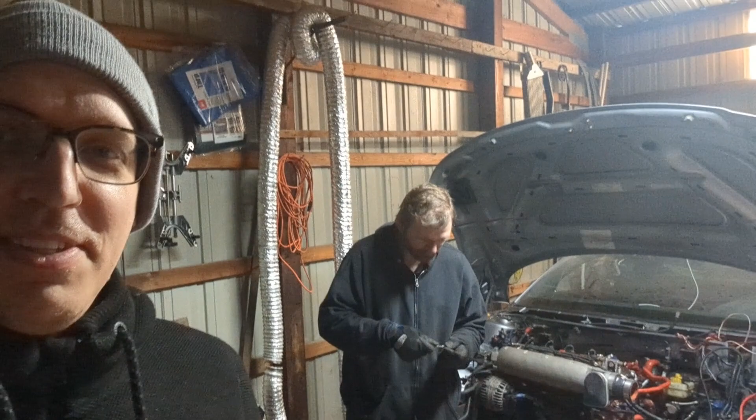The man who comes out of his cave to do the grunt work. Yep, as I've said in a previous video, which you haven't seen yet. No, I haven't even watched it. No, but I did say that.

But anyway, now we're going to get to the drive shaft union and the gasket for the downpipe, which...

Okay, so here we are under the car. Oh my god.

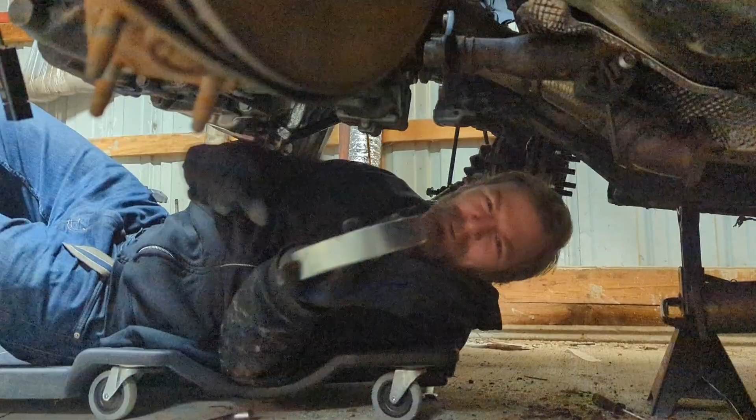I just forgot to record 5 minutes worth of stuff, but we're gonna put the new union on. So here's the new one covered with the metal shroud, and then the old one that we took the metal shroud off. That one's done.

We had a dent or crease a little bit in the downpipe, right around here. That's because the new exhaust manifold moves the turbo over, but it moves the downpipe closer to the drive shaft union. So we knew it was going to rub, so we dented that in. We're going to put the new one on and check the clearance, but it should be okay.

And then we have a new gasket for the downpipe to the rest of the exhaust, which we'll worry about in a minute. We'll put some thread locker on there.

There's 3 10 mil 12 points - is that right? Six, yeah, it's three per side. So we're going to put a little bit of thread locker on there, and then get those bolted up, and we should be good. Speaking of which, and that will be that.

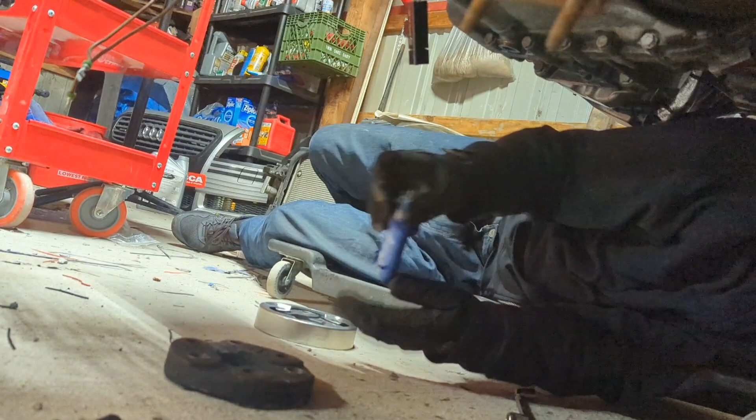And we'll be back when we make some progress.

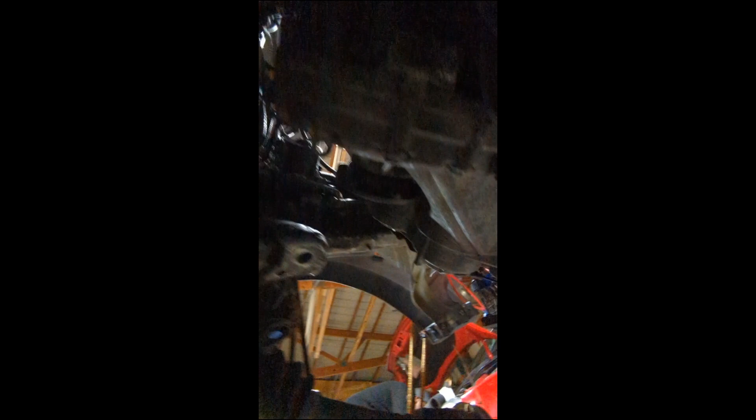Okay, let's see here. This, if you can see it right here, is the new union connected to the trans side. Next will be the drive shaft right here, which connects to 3 identical holes right here.

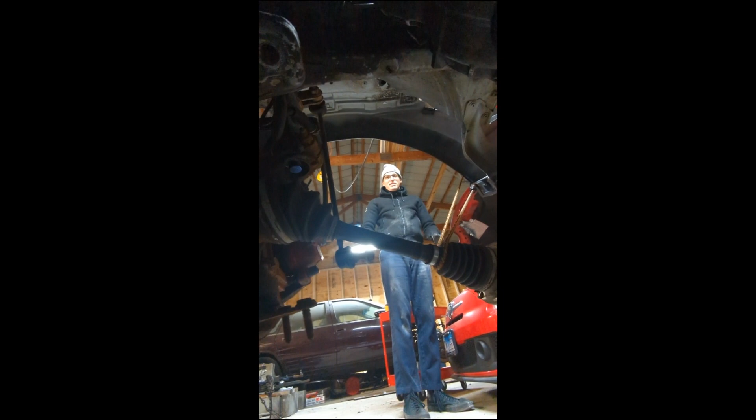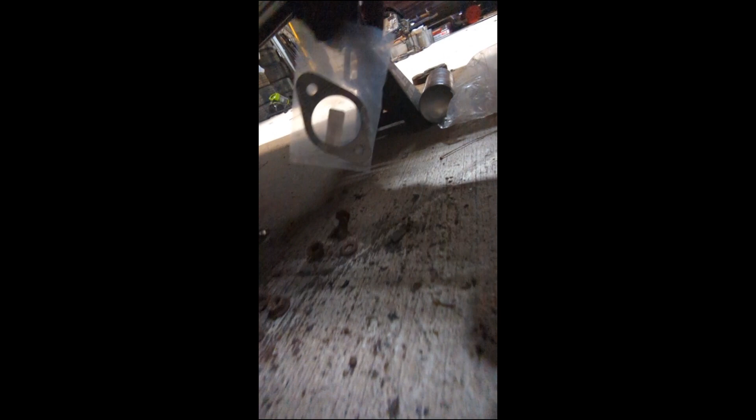And make sure that it spins and doesn't rub. Let's see here, the final - one rusted bolt here. And there's the other rusted bolt, and the nut, and the washer, and the other washer. And here is the gasket, brand new, pretty gasket, which will not look brand new after the first time use.

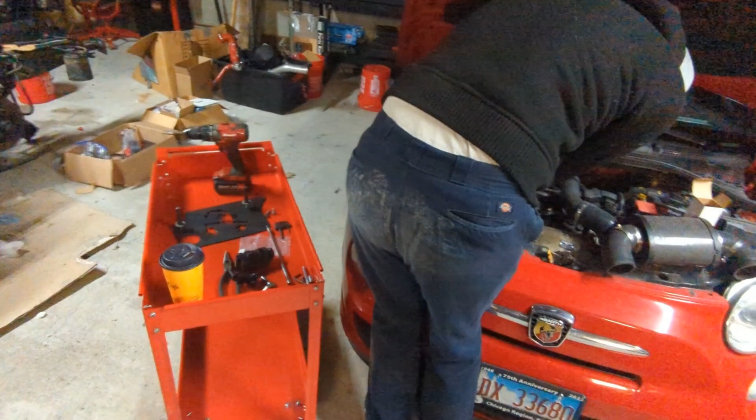And over here, we have a fine specimen of a man. Oh my god. All right, back at it.

So last video, or maybe I'm gonna clip them together, I don't know. But I was here with my friend, and it's kind of hard to do this with another person because stuff is just happening, and then it's like, oh wait, we got to record that, and then it's like, just button it up. So I'll kind of get you a little bit caught up. Not that we did anything major, but just so you're aware of what's going on.

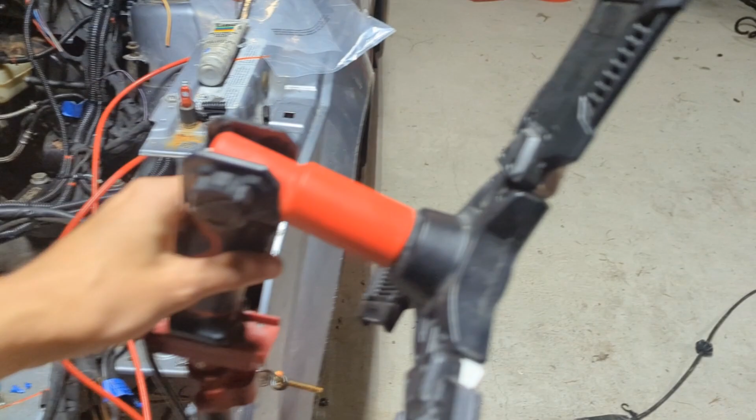So you may remember that the subframe was laying over there. That's on the car now. So the way that went down is, get some light going.

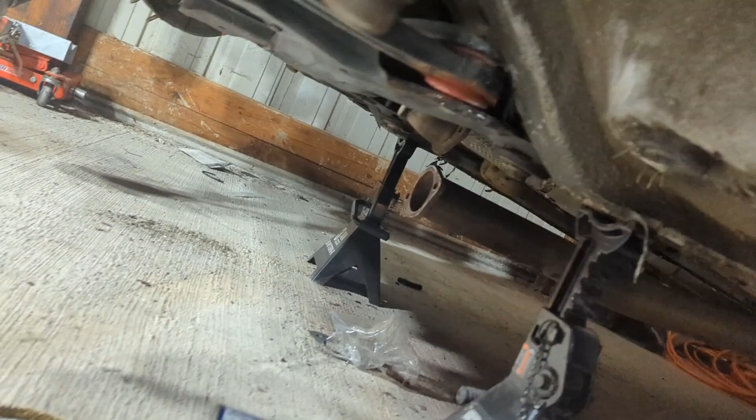So we just took a jack and set the subframe on. It's not that heavy - I mean, it's heavy, but not that heavy, especially with 2 people.

And then just started to run it up. It's 4 bolts - one, two, third one is tucked up here and then across.

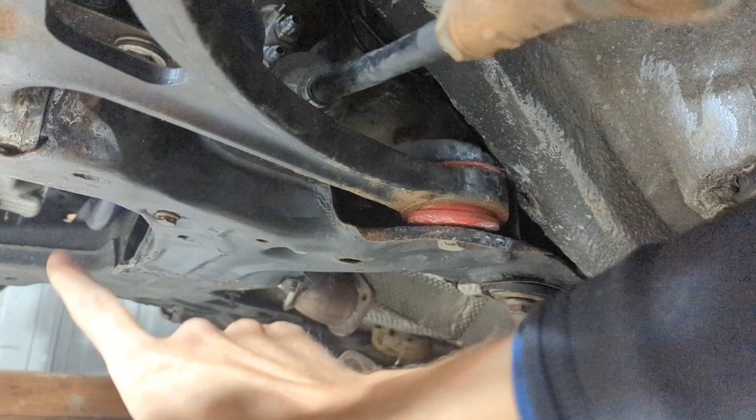This one kind of keeps spinning. I don't think it's stripped, but the subframe got bent when we were pressing one of the bushings out. And so I think what's happening is we're turning it and it's unbending it, but I'm kind of scared to strip that out because that'd be a nightmare to fix.

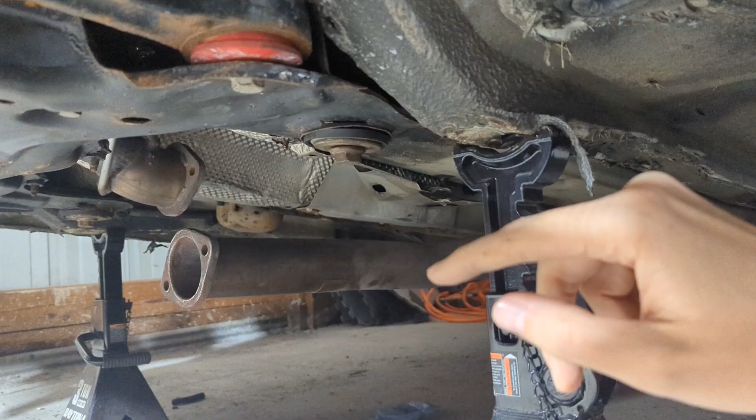So all the other ones torqued except this one, and I'm kind of of the mind to not mess with it. And that probably sounds dangerous, but I think if we just check it every so often, it'll hopefully be okay. I mean, it's tight, but...

I was thinking about maybe taking this one out, taking that good one out, painting like a line on it, and then screwing it back in and just counting how many revolutions it goes, and then do the same for this. And if it's tight but I'm only at half the revolutions, keep going.

But if that thing strips out, I'm not technically savvy enough to fix that, I don't think. Yeah, we could go with a bigger bolt, but I don't think that'll fit the bushing. Then it becomes a whole thing. So I'm thinking about just playing it safe.

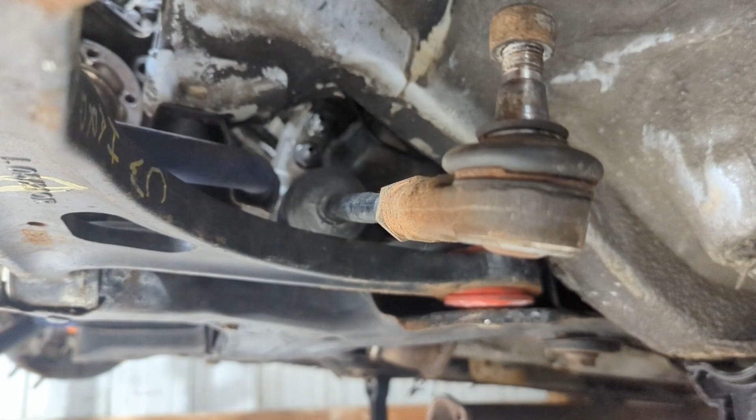Anyway, another thing is the power steering connections. Hopefully I'll still have enough room to get in there and route those down and out toward the pump. If not, it's not a big deal to just drop these 4 bolts and take it back down, which is another reason not to screw with this one right now.

Inside the car, where this goes in on top, there's a splined shaft with a little C in it, and the steering column connects to that. I haven't done that yet, but once I get to it, I'll show how that works.

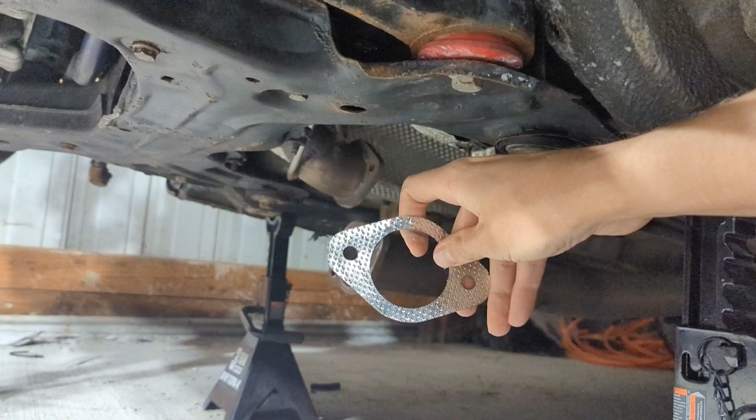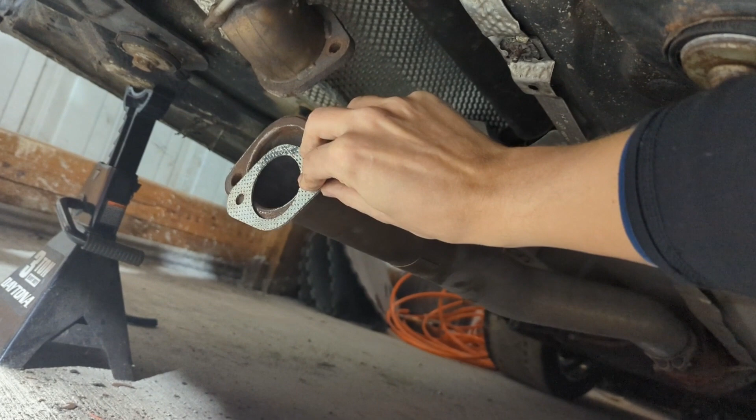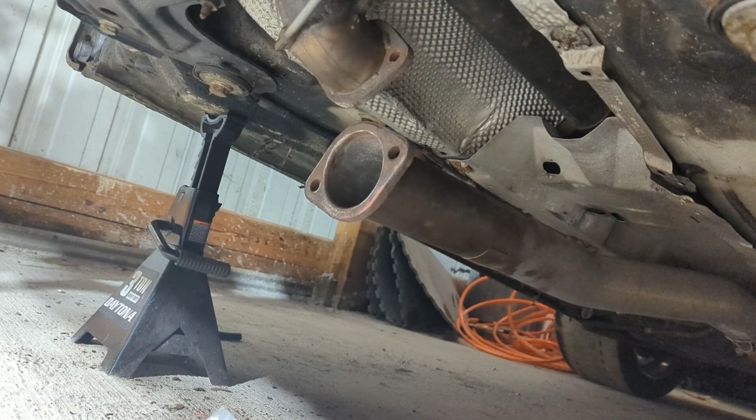That's really all we did down here. We didn't do the exhaust yet. In a previous video I said I ordered the Miltech gasket - it's not the right one, not even close, as you can see. So maybe I use it, but it'll take up some of the hole and probably just fry because of that. So I might get some gasket maker, or use copper gasket maker, and just clamp it together and hope for the best. We'll see. I don't think this is critical, more just so it doesn't sound funky.

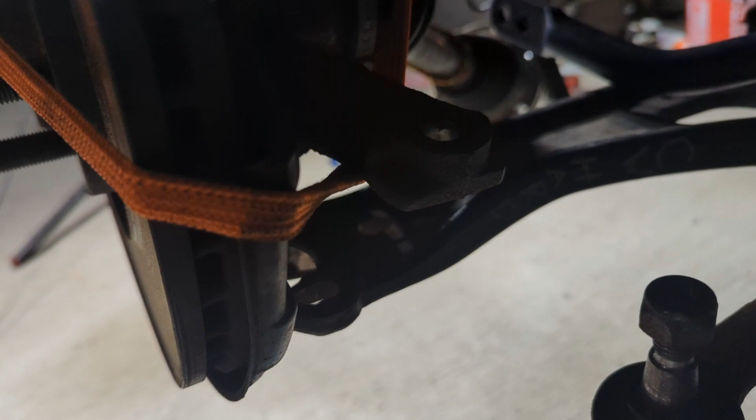Outside of that, nothing else was done. So we still have to connect the toe links and the CV, and get the spindle into the A-arm. Those are all pretty easy things to do.

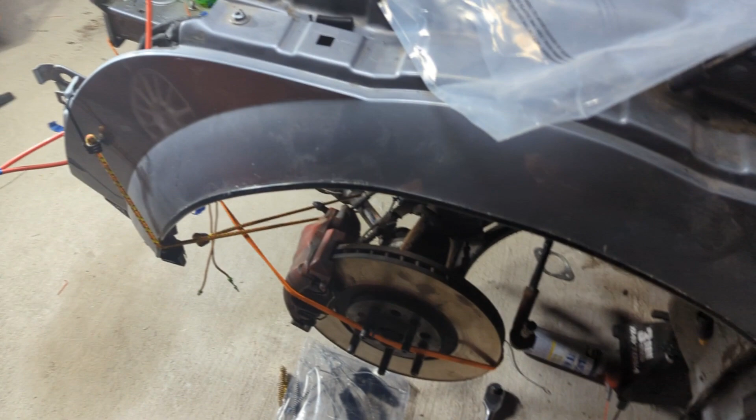I need to do new brakes. These are completely trashed, like fried to the max. So I haven't ordered anything for that yet. I'll probably do some type of upgrade with them, I'm just not sure what yet. It'll kind of depend on what kind of budget I got to throw at it.

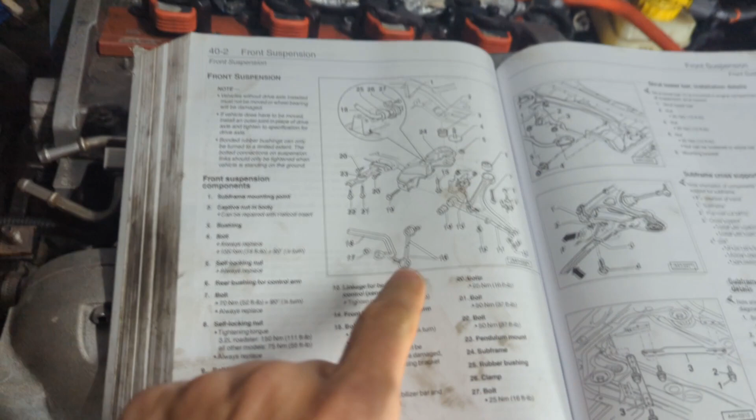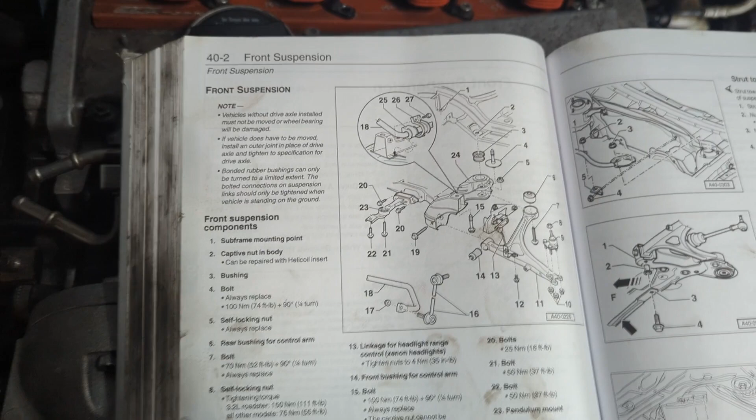Just in case you need to know the specs for putting that subframe back on - that's number 4 and number 15. Number 4 is 74 foot-pounds plus 90, and number 15 is also 74 foot-pounds plus 90. So there you go.

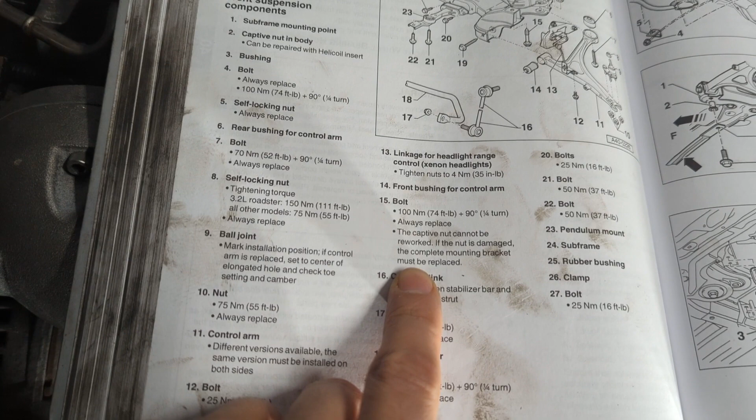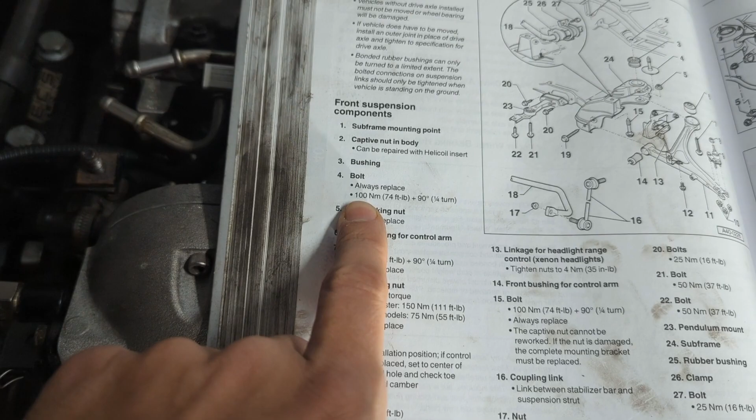And then in here they talk about how there's a captive nut that, if damaged, means the complete mounting bracket has to be replaced. So that's what's up in the car for that one. I don't know if it says that for number 4, so I'm not sure exactly, and that's the one I'm having the problem with. I'm not sure exactly what goes on with that one, but again, we're just going to play it cool, I think.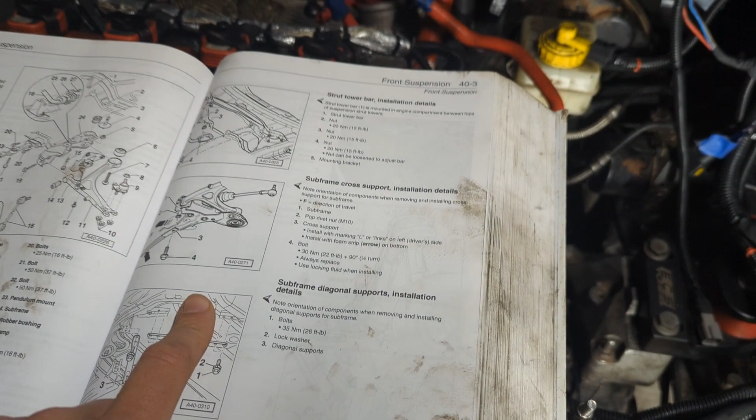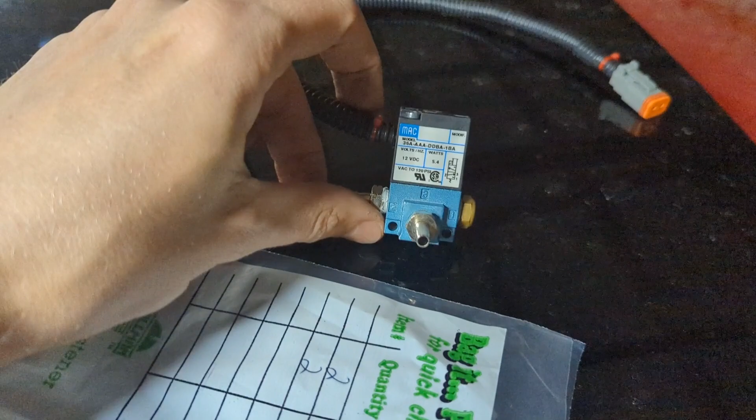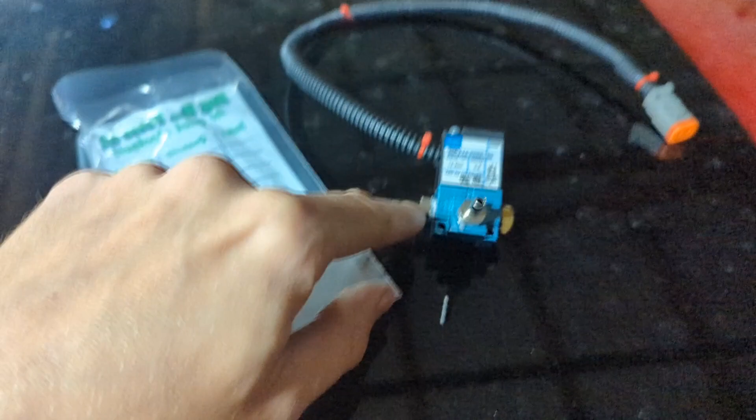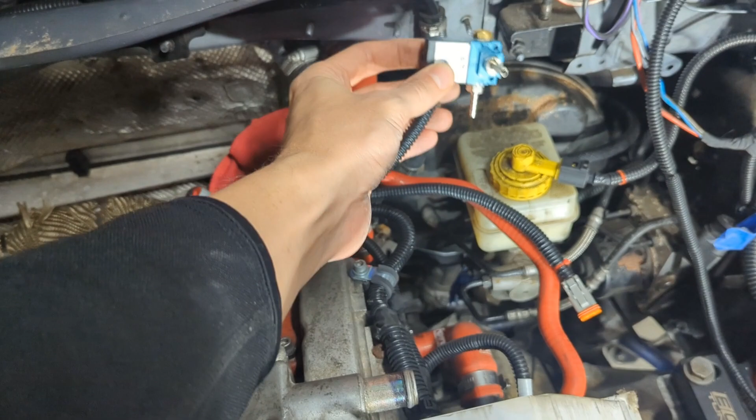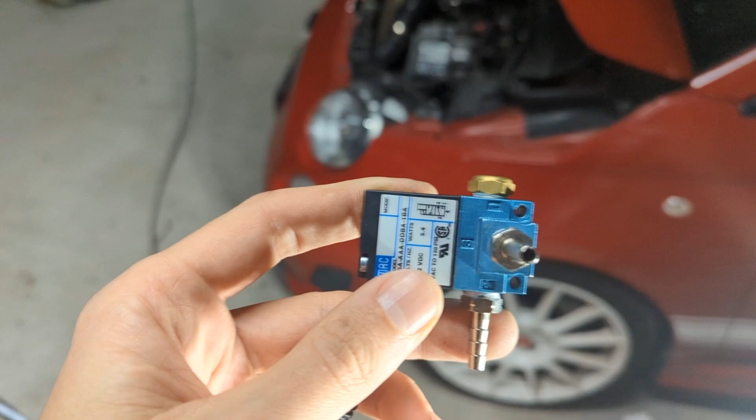I think what's nice is the body will kind of act like a heat sink for it. So I'll drill 2 holes, run the screws through, mount this up, and put the line or hose from the wastegate to the solenoid. That will be done. The other line for that will run to the hard pipe, which isn't in here yet - I'm not going to fiddle with that quite yet.

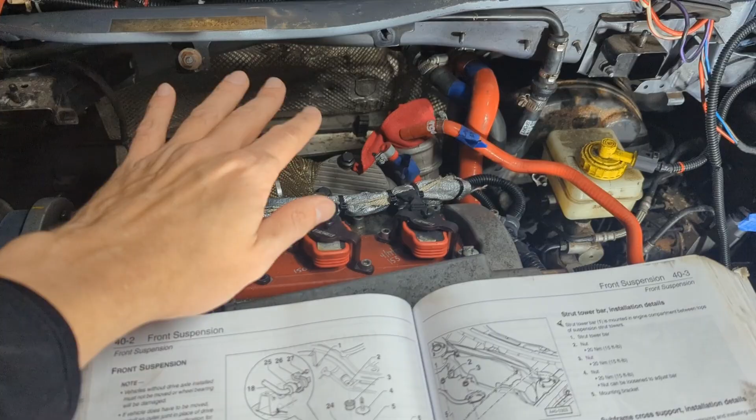Another bolt issue we're having is I think this one is stripped, and there's a mounting bracket it goes into. I think in this case I can just get a new mounting bracket. This bolts into a bracket that bolts into the motor - I think there's 3 bolts that hold that. So I could take that out, replace it, and hopefully be good to go. If I did have to go with something larger here, I certainly could. I also saw a really cool trick in a YouTube video that makes sense to me.

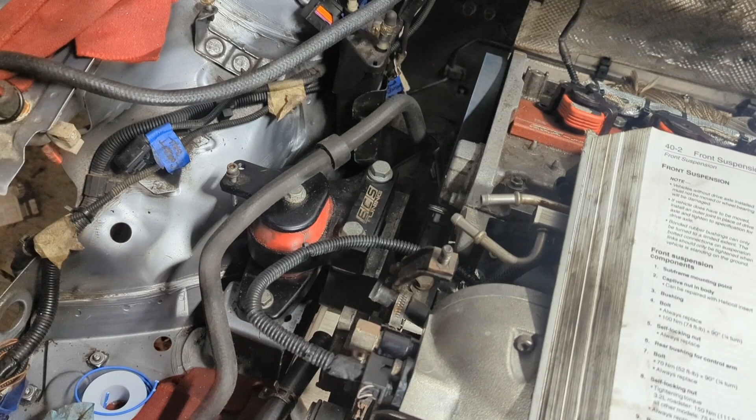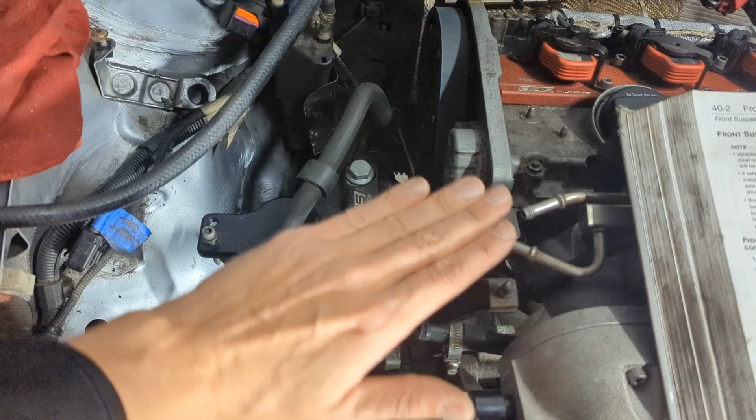I don't see it working for me, but it was cool to see it work for this other guy. Basically what he did: in this situation where you have a problem hole, you drill that hole bigger, like 2 sizes bigger, then find a bolt that fits. Put the new bolt into the new hole, cut the bolt flush, then tap into that bolt for this hole, and put that in.

And then you use Loctite, and he also dimpled the threads so it would bite as it's going in and won't come back out. He was able to torque a new bolt into the bolt he put in there, and it was pretty cool. So I was thinking about maybe doing the same thing, but then could we just tack weld the top a little bit just to ensure it doesn't come loose or spin.

I feel like these brackets are plentiful, I just have to go on eBay and find one. But if it becomes a whole thing, I kind of think this idea of putting a bigger bolt in and then tapping into that would be kind of interesting to try.

So that's about that. I'm gonna maybe put the fuel lines in, they'll kind of be dangling in the way, and maybe there's other better stuff to be doing. But I think I'm just gonna keep chipping away here to get this to the point where it's ready to start up.

In order to do this wiring here, I just keep forgetting to do it, but I need 2 resistors, or I think I actually need diodes, to prevent one thing being on from backflowing electricity into the ECU while the other thing is off, or something like that.

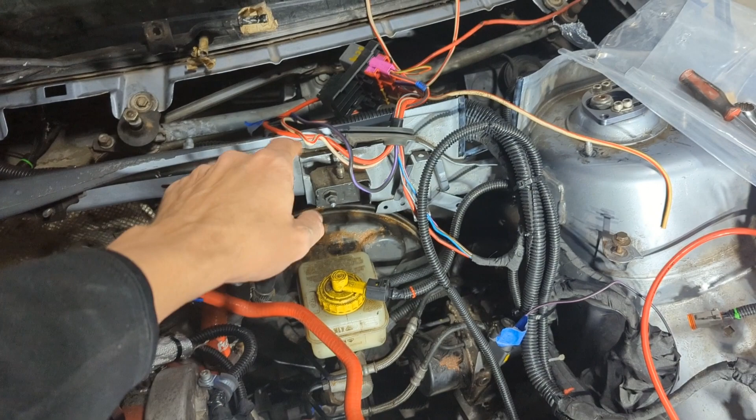I have the diagram for it. I went to Micro Center, apparently they don't sell diodes. They have resistors and LEDs, etc., but not a normal inline diode. So I'm going to research that, order it, get that wired up, and then I can clean all this up and that'll be done. Again, that's to set it up so the ECU can have after-run when I shut the power off.

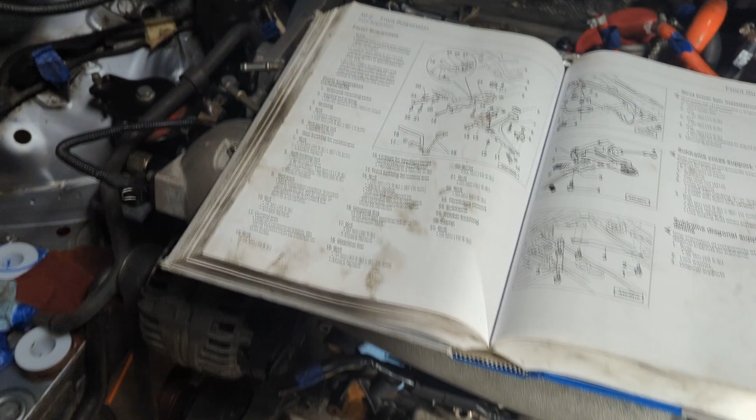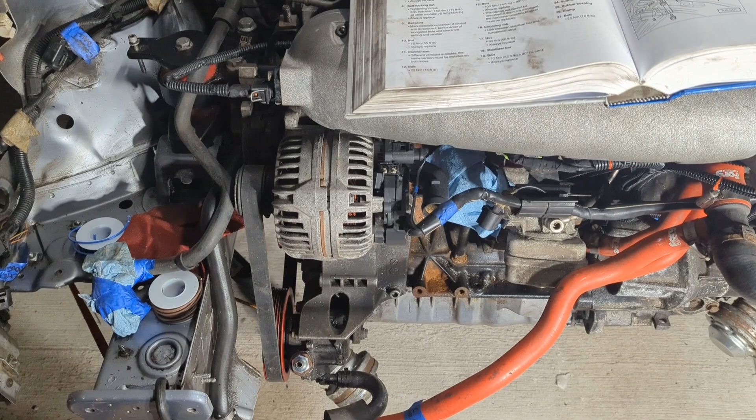I still have to get the power steering lines figured out. I haven't bought any of the fittings yet, but I probably need to take some time and research what exactly I need to buy and go get that stuff.

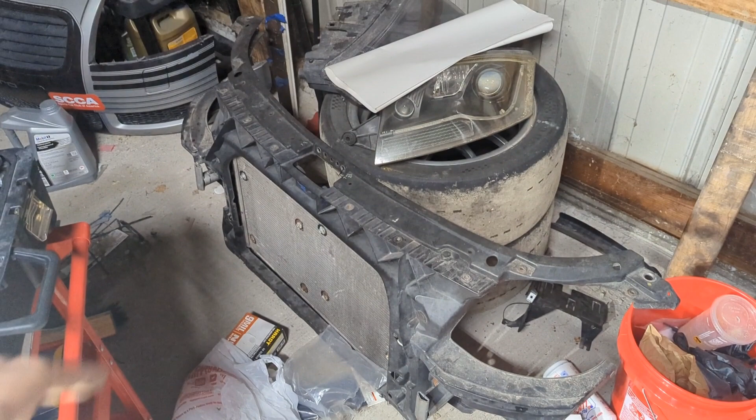Yeah, other than that, I think it's just kind of putting stuff together. The front end is going to be a little bit of a thing - not a whole thing, but there's 2 fans on there, so I want to take those fans and wire them into a connector. Not 100% sure though if the amount of power going through those can be serviced by...

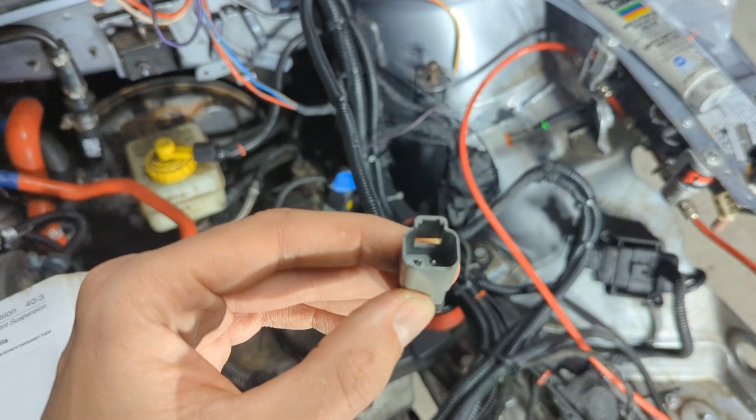Where is it... one of these. I don't know if that's too small for the current requirements of running the fan, but I think I might try, because I have this whole set of plugs somewhere. Here they are.

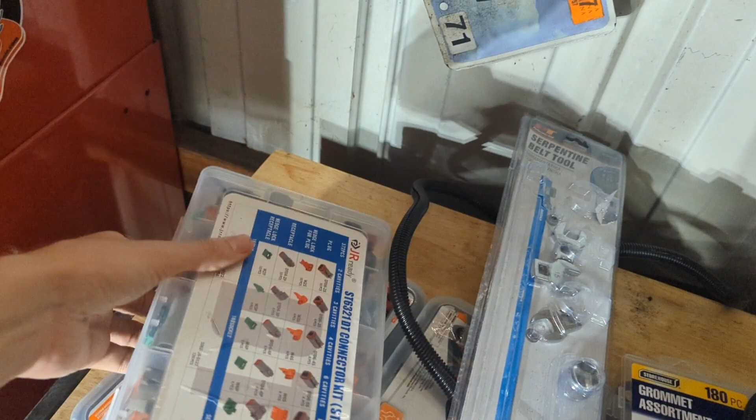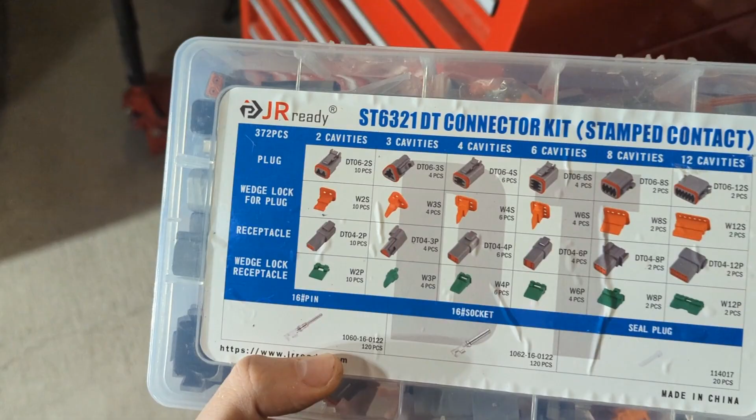So I have these, I ordered this off of Amazon, and it's basically like the Deutsch style connectors. These are really easy, you need... I got 2 tools to help me do all the crimping, but I've really liked working with this so far, and found it very easy to wire stuff up, or wire connectors. I've done that for the MAC valve, as you saw, and that was the other end of it.

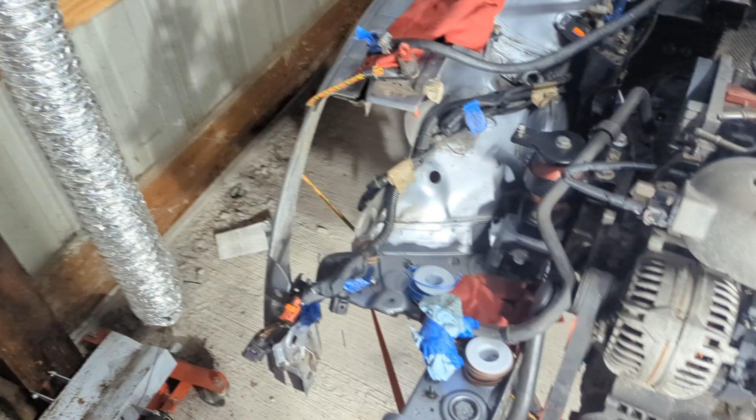Okay, well, that's enough yammering. Let me get to work and I will update as I go. All right, so making some progress here.

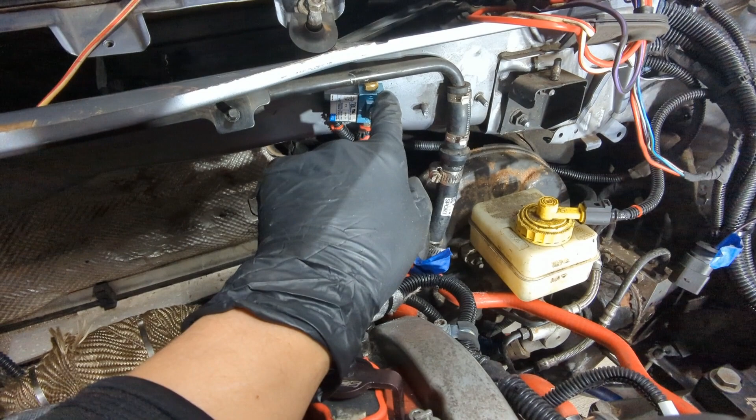I drilled the 2 holes. I drilled the top one first, put the screw in hand tight, got it set up where I wanted, drilled the second hole, and then put that through—just so I wasn't trying to hold it and drill 2 holes, which inevitably will never align correctly. So I find it best to run the first screw and then do the second one where you can.

And then ran the connector or the wires out of that, from there to the connector coming from the ECU. So that part's done, and then I clamped this onto the nipple.

Ordinarily I would have thought using zip ties was a really ghetto thing to do, until I took my car to a race shop and it came back with all the air hoses zip tied on. I asked about it, and they said well, what happens a lot of times is you put the metal ones on and that tail comes out and starts scratching the hose next to it. So for air hoses, it's totally fine to just use a zip tie.

So I did it hand tight as much as I could, then put a pair of needle nose on there, put a screwdriver on the box of the zip tie, and kind of push and pull at the same time to get 1 or 2 more clicks out of it, and it's solid. So highly recommend doing that, and don't feel ghetto if you do.

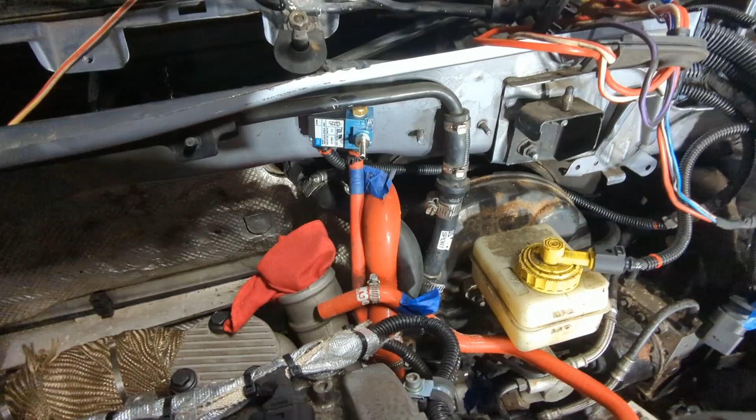That's all good. Obviously I don't have the hard pipe yet, so we're not going to worry about the other side. You can't really see how it's done up, but basically there's the 2 screws that ran through, and I just put the nut on there and turned it through.

Rather than getting a screw head, I should have really gotten a bolt head, or one of those round ones, or the hex heads where it's round but the hex is in it, and you put an Allen head in it. But whatever, it should do.

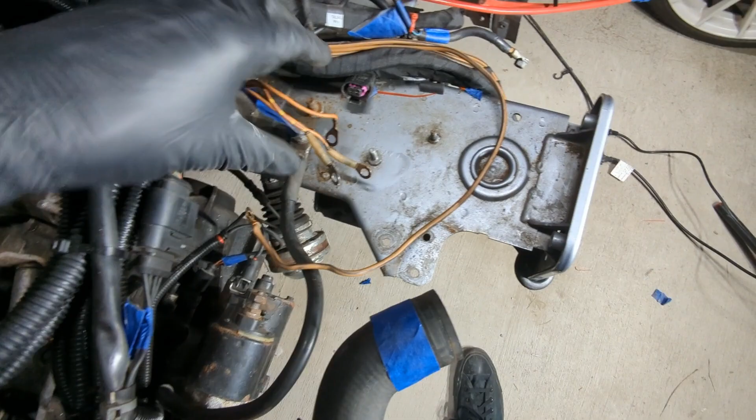So now I was taking a look at some of the wires down here, and I think I can get these grounds on. So I took the Dremel, the Harbor Freight one with a wire wheel attachment, and I hit both the eyelets and that bolt that I'm going to screw them to. So that should be okay.

A lot of times I saw on the car there was like a black, almost crown-looking thing, and all the wires would sit into it so they wouldn't be wiggling. So I'm going to see if I can find one—hopefully I didn't throw them all out. But I'm just going to ground these all up real quick just to get that done, because these things are just kind of flopping around, might as well go back together now.

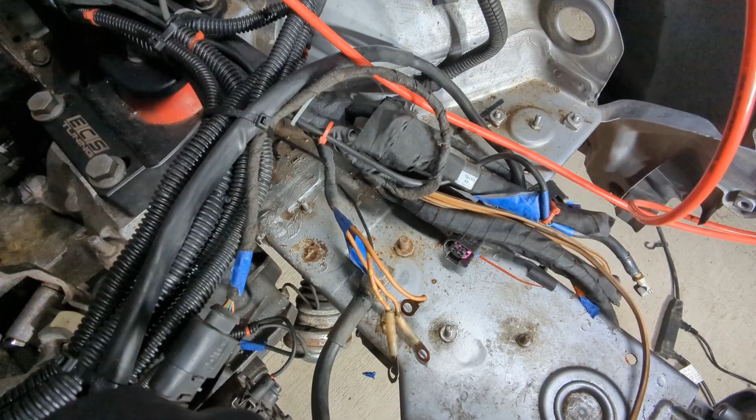What else? I think that's it. So yeah, let me keep going with that, and if I figure something new out, I'll come back.

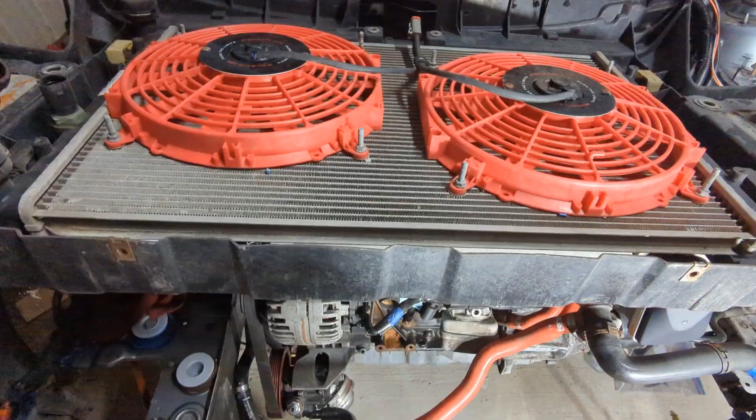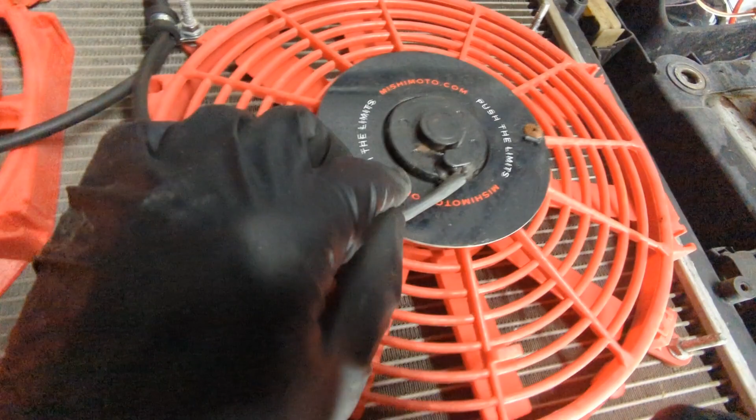But basically I took the ground and positive from the 2 fans, got them clamped up, and then fed into one of the connectors.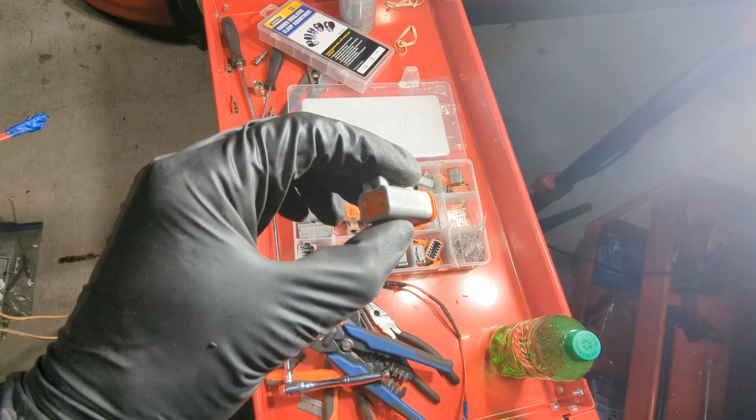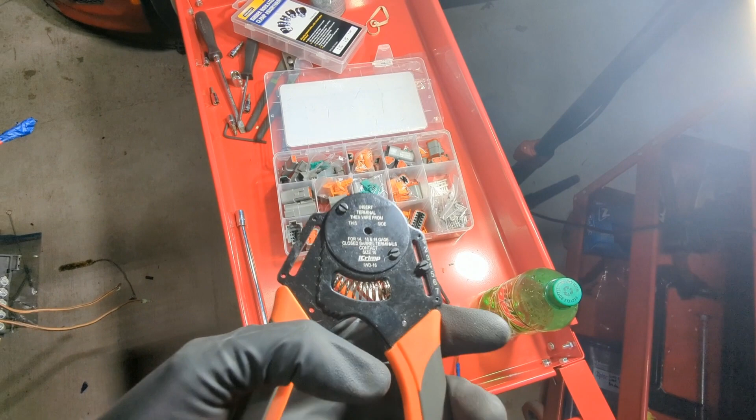In order to make that connector work, I just grabbed one of the 4-pin female connectors, and it's pretty simple. You take the female metal ends, strip the wire back, push it into the back end of it, then take this crimping tool, put the pin in here with the wire inside of it, and just ratchet squeeze this closed, and that makes a really great crimp.

And then I use this other crimp to do some of the half C's so that the tail of the metal pin grabs the wire. So that was all set, and then I can use some of the fan grounds from the OEM fans to power, or get the ground to the fans.

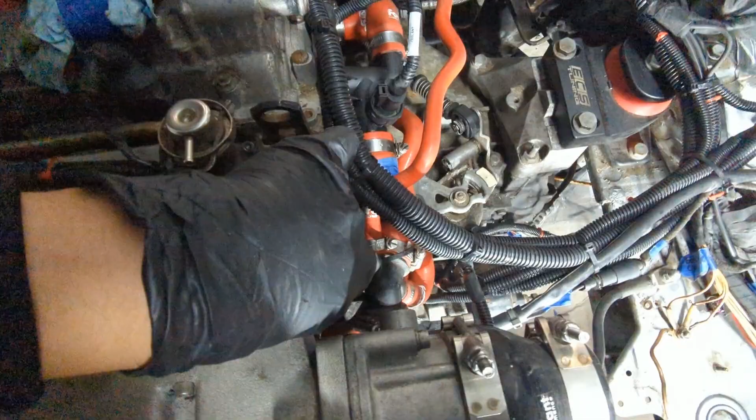That's all good. And then as a last piece, there's this coolant line that tees off of this main branch, which goes back to the coolant bottle. So I had to mount the hard line here with 2 10mm bolts, and that hard line comes back to the coolant bottle. So that was it for the day. See you in the next one.